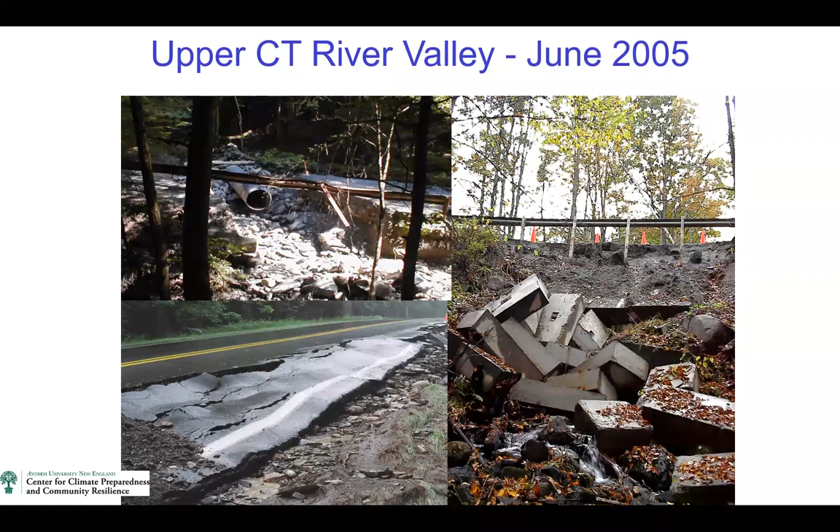So, just like others have seen around the country, there seems to be an increase in the frequency of more extreme weather events. Now, these events are occurring at a scale that exceeds the in-place capacity, or what we call the resilience of built infrastructure. Now, in the state of New Hampshire, it's become evident to every citizen in the state at some point in the past they have experienced this.

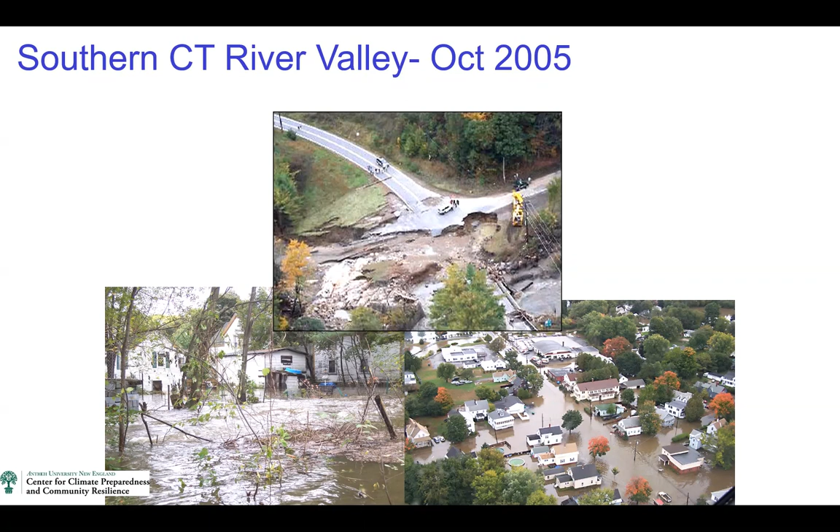Many of these storms were extreme events outside the historical norms. In this example, the rainfall amount had the likelihood of occurring in any one year of 1/5 of 1%. And that's basically the 500-year storm. And we see this in other places across the state. This was Western New Hampshire in 2007, and Western New Hampshire again in August 2013.

And because people are seeing warmer winters up here in the Northeast with more rain and ice storms versus snow events, the precipitation events don't necessarily occur in extreme amounts, but they still can be quite destructive.

This is because instead of rain occurring in the late spring or summer, and snow in the early spring and winter, the snow events, which melt slowly, we are now seeing more and more rain events in the late winter and early spring, and they're falling on frozen ground. And just imagine the runoff of falling on frozen ground. It is just like rain falling on pavement, and it runs off with no infiltration.

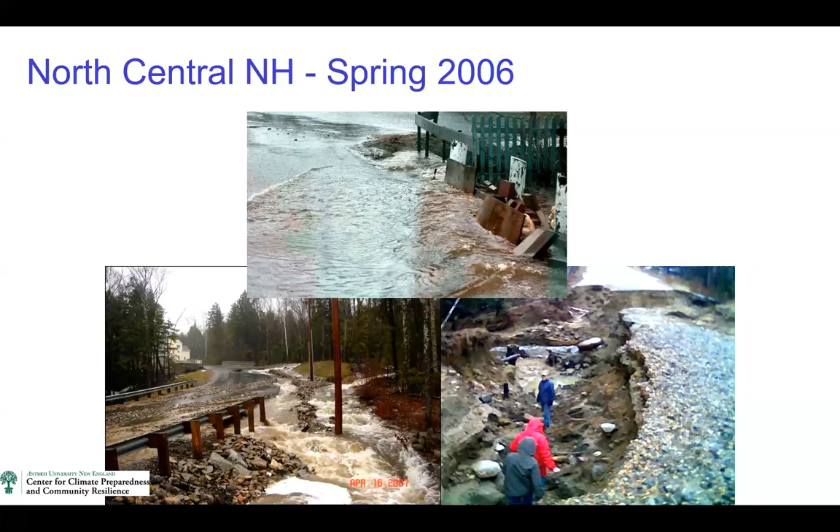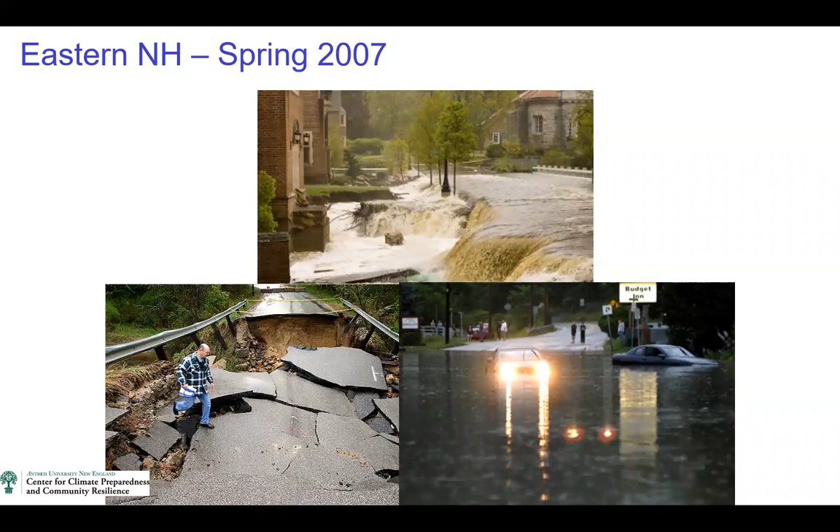And it can even be when the snow is gone. This is known as the Mother's Day flood in eastern New Hampshire. The ground was still frozen in the forested uplands of the watershed. And so even though there was no snow down below, the runoff event from a non-extreme storm event caused amazing damage.

But even these numbers are probably low, because the difference between what the government pays for in reimbursements and what it doesn't is significant. And we will dive deeper into this when Kevin Geiger joins the class next week.

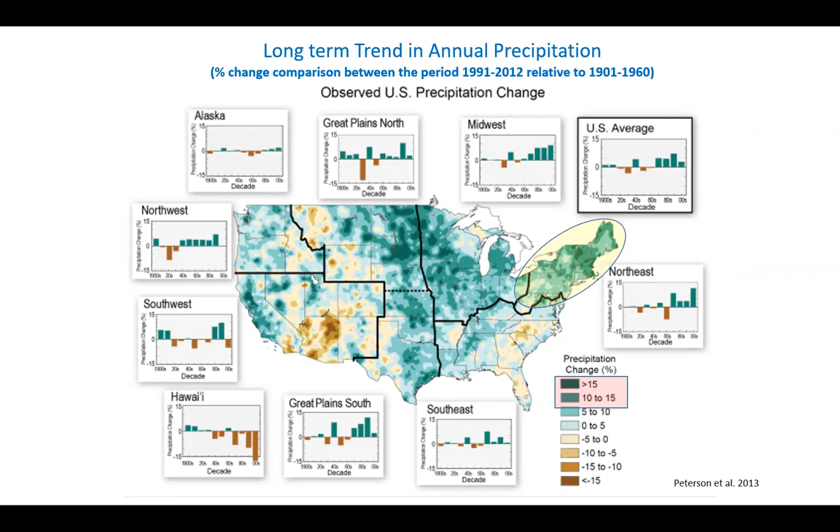Now, if we step back and just look at the larger trends, what the data is showing us is average annual precipitation has been increasing historically in the Northeast on the scale of 10 to 15%. And researchers have shown through a number of scientific studies, when one sees an increase in the mean or average and an increase in what we call the variation of events, there is a disproportional increase in the most extreme events.

And we see this here, where the Northeast annual precipitation has increased on the scale of 15%, but the extreme precipitation events have increased by 71% over the same period. And this is a fourfold difference between annual average and extreme.

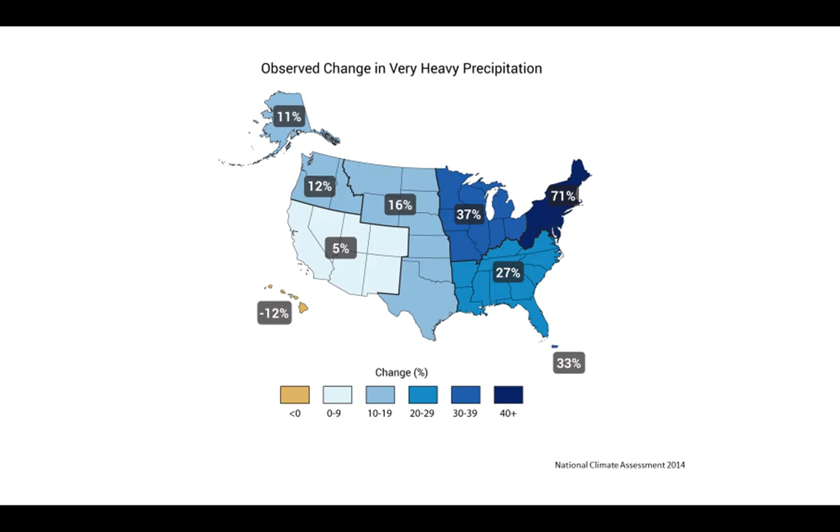And if we look at whether these trends are projected to continue, in the pessimistic future scenario, which is we continue doing what we're doing right now as far as loading carbon dioxide into the atmosphere, the northern United States is projected to receive more precipitation, especially in the winter and spring periods.

Now, the areas with the red dots on these maps show where projected changes are large compared to natural variations caused by other natural phenomena. Areas with the hatches show where changes are small and relatively insignificant compared to natural variations.

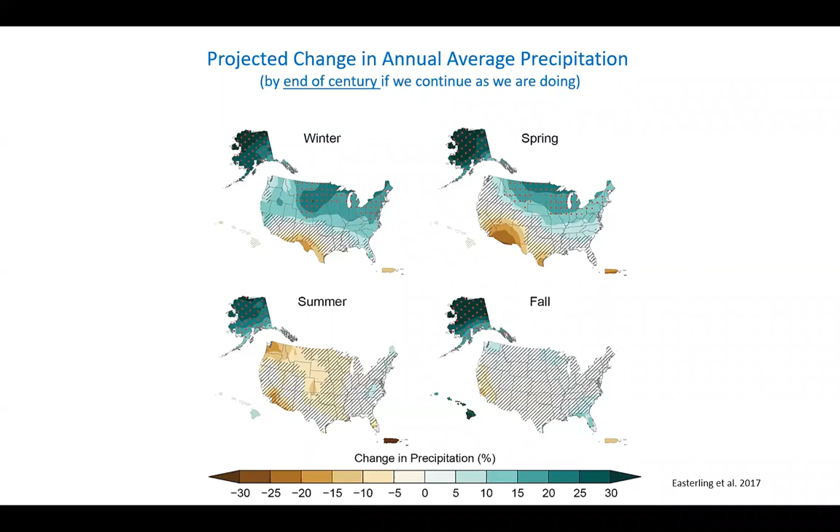Similarly, extreme precipitation events in the Northeast will also increase on the scale of 30 to 40%. And even with the optimistic future where global temperatures are kept below 2 degrees centigrade, which is the goal of the Paris Accord, there will be increased impacts.

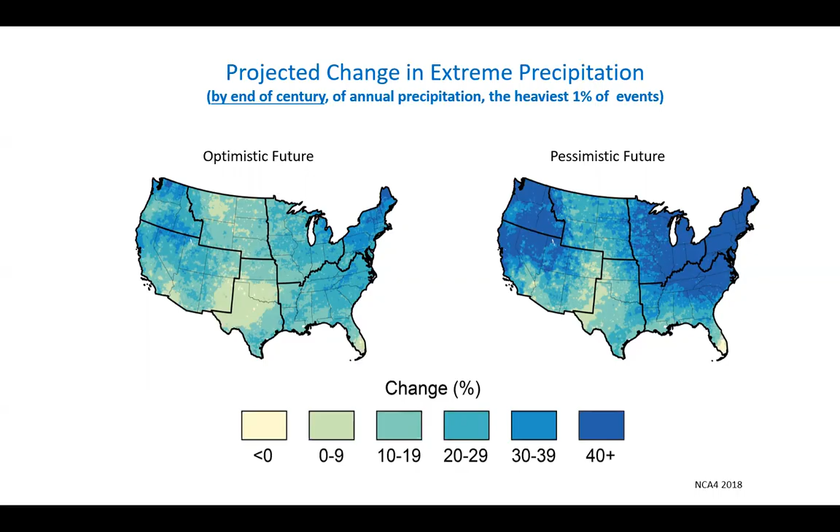So in this context, I want to cover a culmination over 10 years of research by Antioch researchers, both in New England sites and the upper Midwest. But for today, I'll just be referencing 3 of these, which are in New Hampshire. And I'm going to focus on the economic arguments being put forward that associate the scientific analyses.

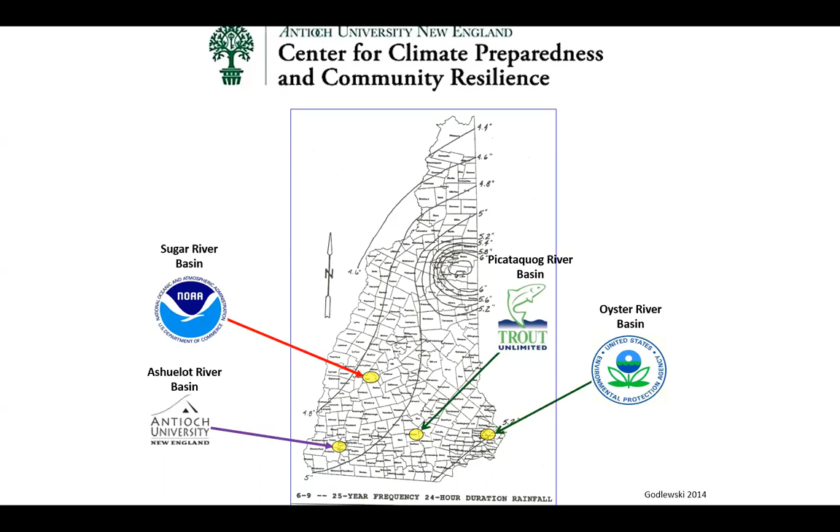Now, the economic arguments being framed in these 3 studies are around not building resilience into a system. An example here can be seen in Keene, New Hampshire, where Antioch is based. In 2005, an extreme precipitation event caused damage to the drainage system and associated road. It was approximately $8,000 in cost.

Well, the city repaired the damage with the help of some federal funds. But because they used the federal funds, they were required to replace the obviously undersized drainage system to the same size and specifications. Well, 7 years later, it happened again, but the damage costs were significantly higher, again due to the undercapacity resilience of the drainage system.

Now, the overarching take-home message is to understand the incremental cost, what we call the marginal cost of building resilience into built infrastructure, compared to the costs of such infrastructure failing. So this argument is known as a damage avoided cost strategy.

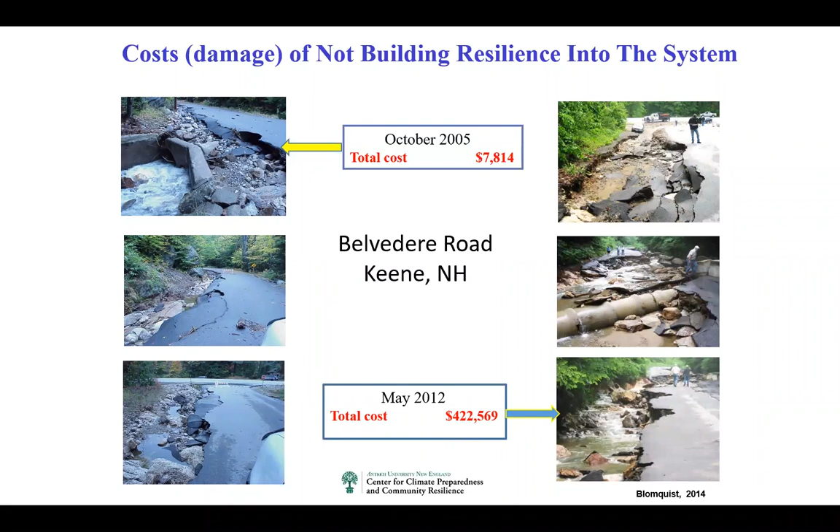An equally educational example, building resilience into water conveyance infrastructure versus the cost of damage occurred, came just after we completed a study in Southwest New Hampshire for the Ashuelot River watershed. Just 1 week after we reported out our results, a 500-year storm event, that's 13 inches falling in 24 hours in this region, hit the watershed.

And in fact, the Federal Emergency Management Agency, FEMA, has collected data over time to show that it is typical to see damage costs being 4 times the cost of building resilience into infrastructure. And speaking about FEMA here, for this location, they only reimbursed about 30% of the damage cost. Again, we will learn why this is occurring when Kevin Geiger joins us next week.

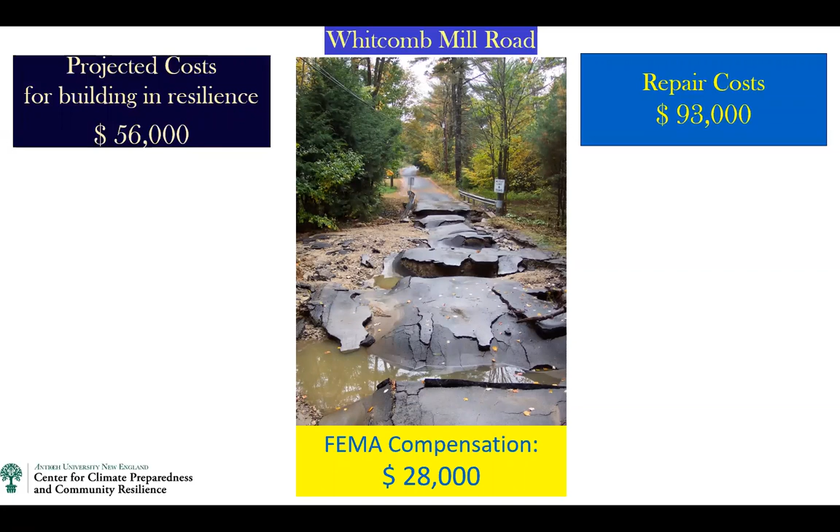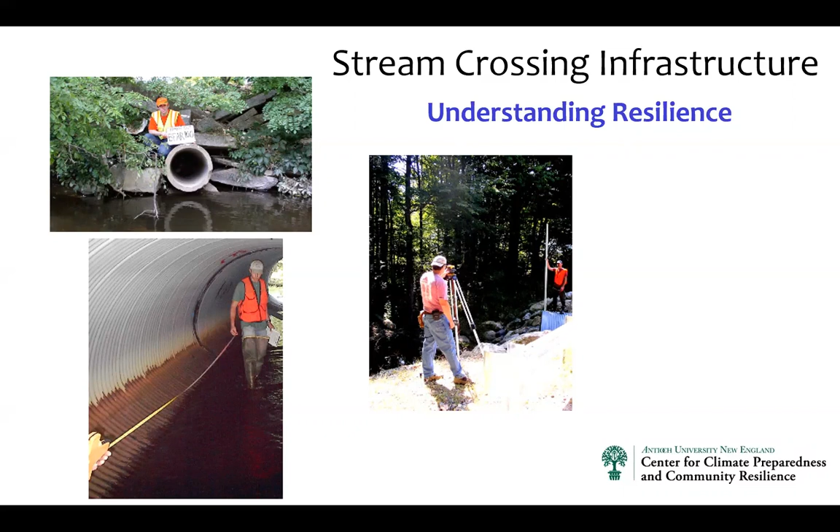So, our research focused on assessing the vulnerability of communities' water conveyance infrastructure due to a changing climate in the context of a changing landscape. In short, we were looking at culverts' capacity to pass peak flow of runoff. Now, why focus on culverts? Well, it introduces easy to understand discussion of land use, increased runoff of water, and projections about the future.

And culverts are easy to field check and measure so that we can test the models we're using. And culverts have a tangible dollar value attached to them that can be used to do replacement and mitigation cost analyses.

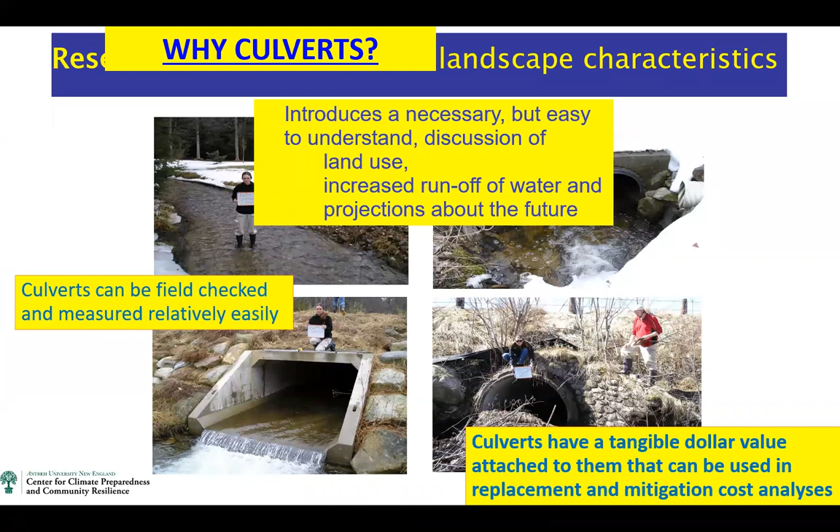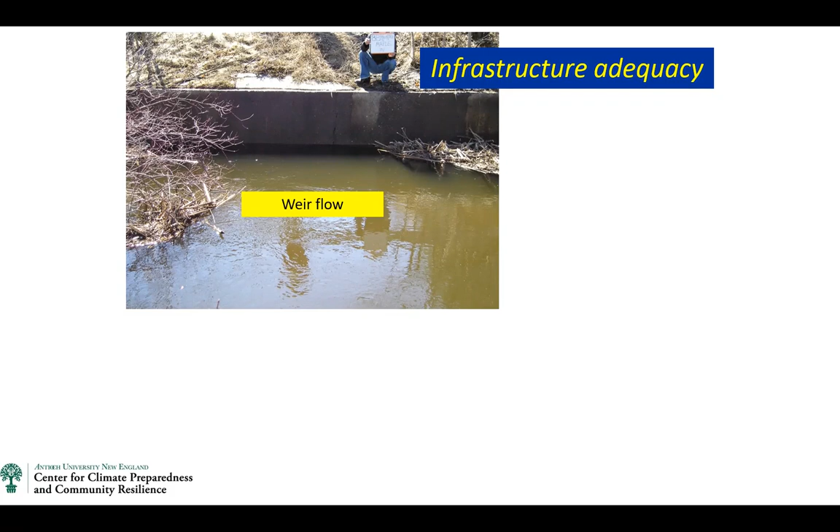So for our study, infrastructure adequacy, that is whether a culvert was properly sized, either for historic or future precipitation events, came in 3 designations. One was it was adequate, okay, which means it was in weir flow, that at the peak flow, water could get through the culvert. Then we had what we call close to orifice flow. This was transitional, where the peak flow completely filled up the culvert and there was not any margin for additional runoff.

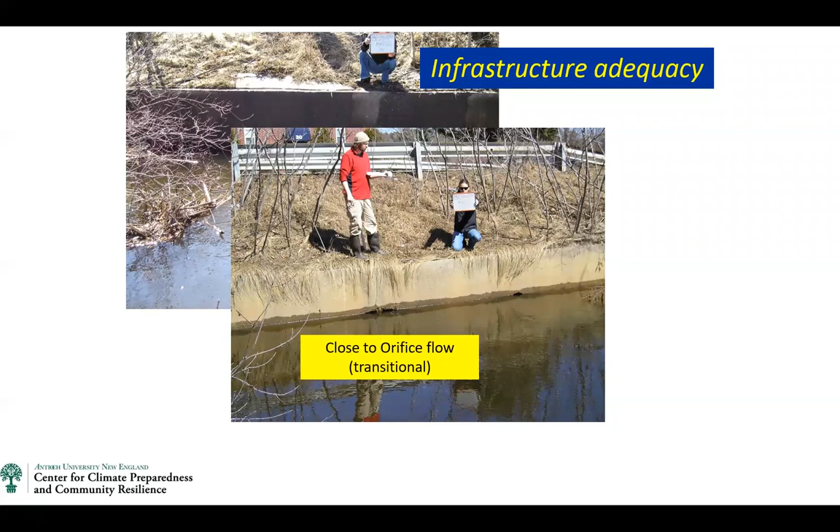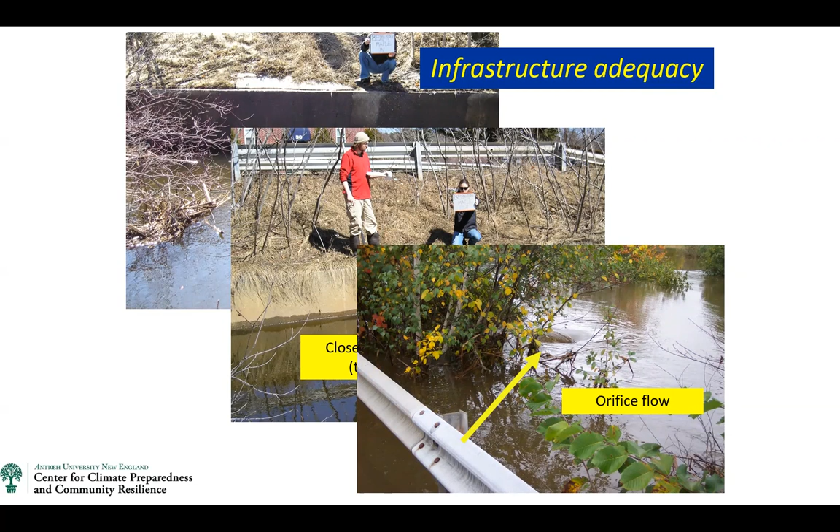And then there was orifice flow, where the pipe was undersized for the amount of runoff and water basically started to back up. You see this little picture here, that whirlpool, there is actually a culvert 4 feet below that.

Now, there's going to be associated cost impacts from undersized culverts, both related to up and downstream property damage, either from flooding, erosion, sediment deposition, or sediment transport further down the watershed, impacting natural systems as well as built infrastructure.

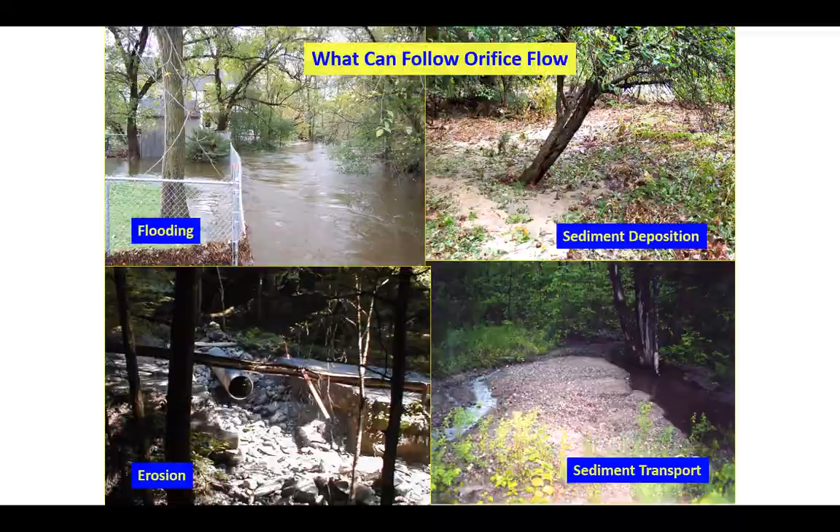Now, of course, we as scientists always make things a bit more complex, but in essence, we are using well-tested approaches in these studies to build a view of the current and future infrastructure capacity and associated costs. The analysis of changing precipitation patterns was looked at, considering also a changing landscape, that is, putting more impervious surface on the landscape, to first determine, were the current culverts in place vulnerable or resilient?

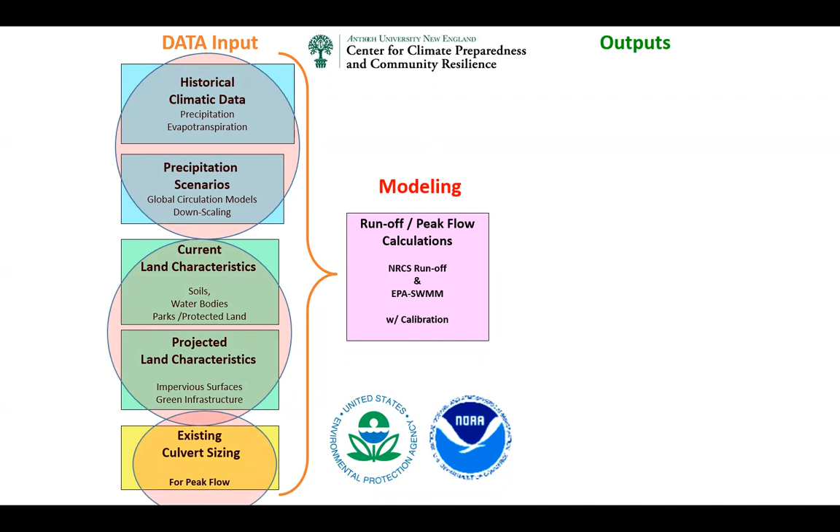We would use off-the-shelf hydrologic models to provide the outputs, and the outputs would assess the capacity and resilience of the current infrastructure, and from this analysis, understanding system resilience.

And we could consider response options such as upsizing systems for the expected flows, that is, making larger culverts or stream crossings, and also how we might mitigate the impact in this case by building out the watershed utilizing green infrastructure. And this is what Dr. Robert Roseen will go more in depth into and provide cost analyses of what that means on Wednesday.

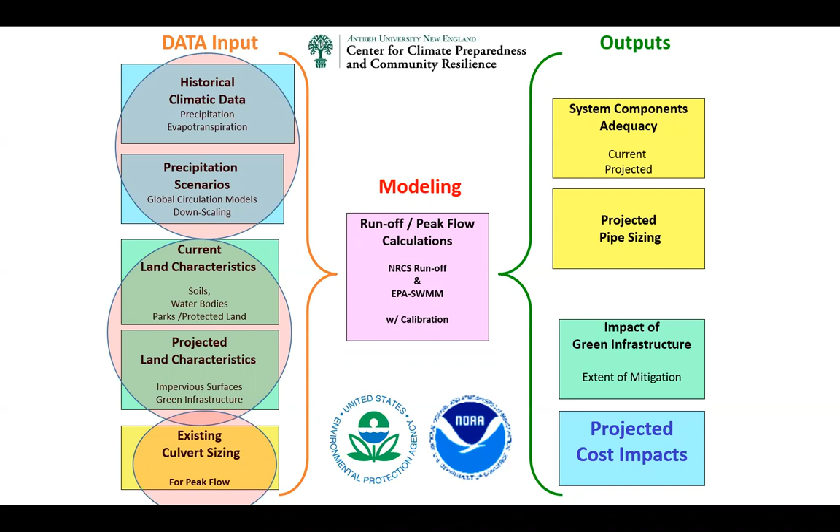So let me use one example of how one would pull together the various pieces to conduct a vulnerability assessment and the associated cost impact analysis. This is a multi-year study we did that was funded in part by NOAA in the Lake Sunapee watershed. You can see that watershed had a lot of micro watersheds in it. And so we were looking at approximately 210 infrastructure choke points.

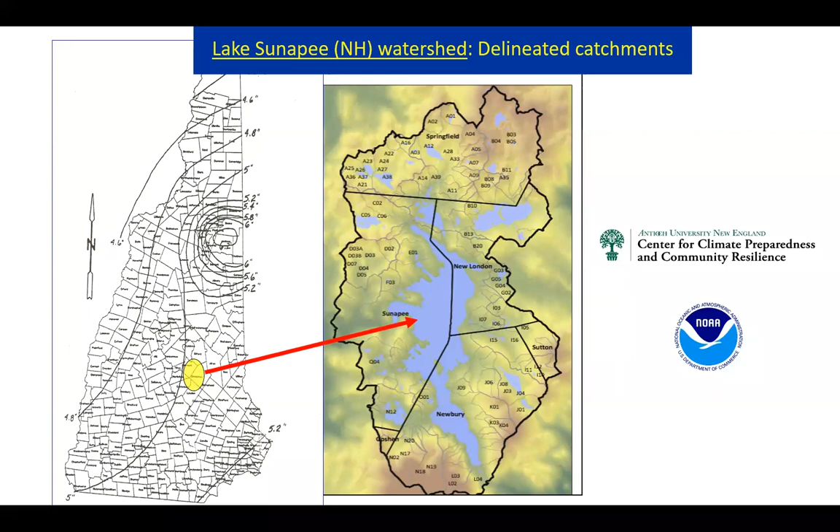Now this example of our outputs was called a stoplight map, red being undersized road crossings, stream crossings, green adequate, and yellow at 100% of flow capacity, which are transitional. So we were able to identify specific locations of undersized culverts to the peak flows of stream and road crossings, both historically and projected into the future.

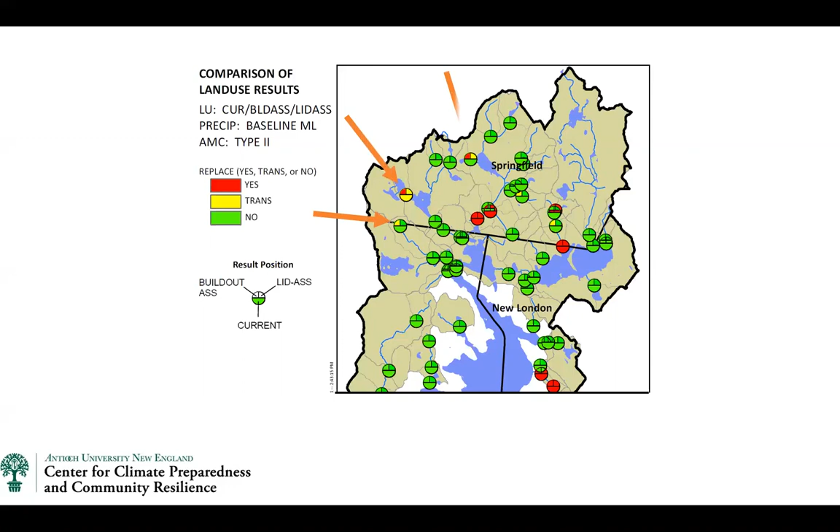Now, the future scenarios not only looked at projected precipitation from a changing climate, but also considered increased impervious surface within the watershed due to projected development patterns based on master plans and zoning ordinances. Thus, they informed land use planners about places not only where the culverts were possibly in need of replacement, but also what parts of the landscape where they may curtail development or enforce mitigation measures.

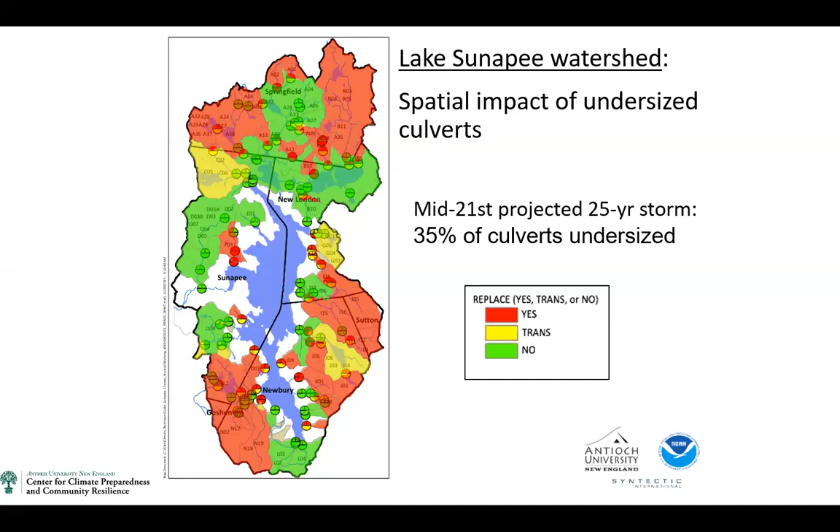Now, doing the associated economic analysis, we used national construction cost estimators, such as RSMeans construction tables, to estimate the cost of replacing each size culvert with one of adequate capacity for any future projection. So pricing schedules were developed for each culvert size and type. And you can see that this looked at labor costs, materials costs, design costs, etc.

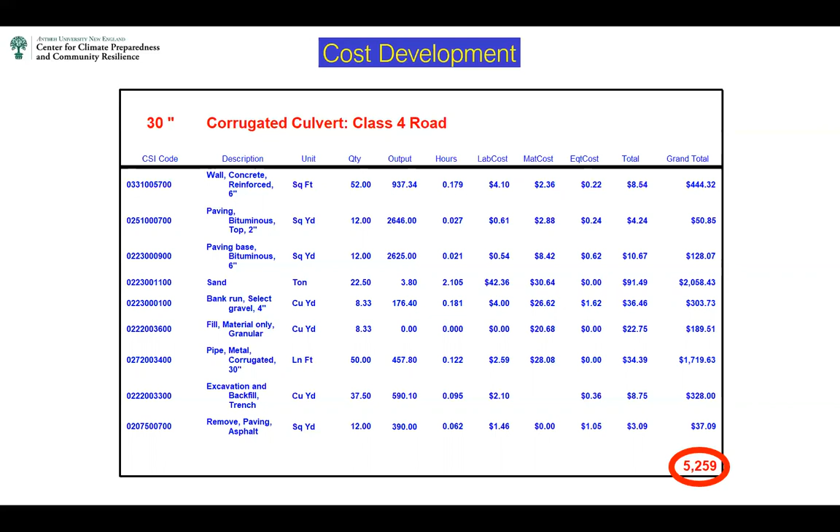Now, we ground-truthed these culverts by going out with the local DPWs to see where they had already seen such damage. And then we extrapolated to the entire basin for specific culvert sizes based on our cost estimator pages. So for one sub-basin, the White Brook sub-basin, you'll see, using our construction cost estimators, we were able to come up with a total cost for different size culverts that needed to be upsized.

Now, if we extrapolate this one number based on the culvert sizing to the whole watershed, we could see a $2 million increase in expenditures to make all culverts resilient.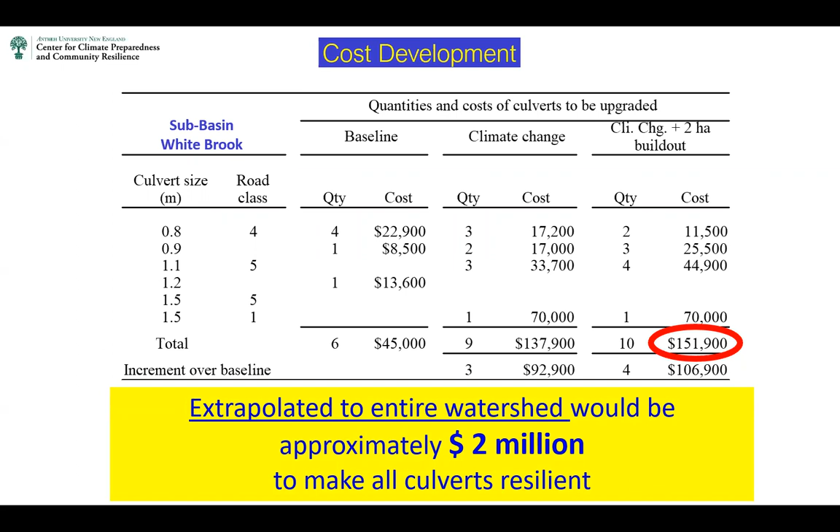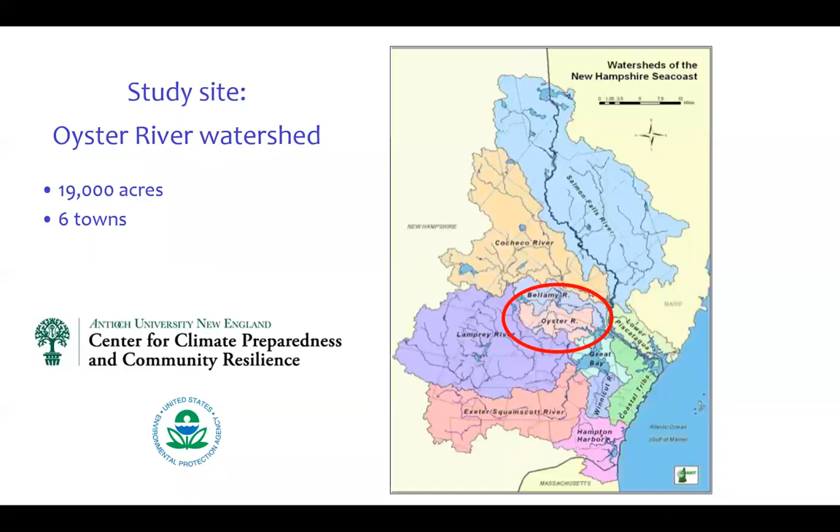Now, another study looking at the same dynamic, but this was a coastal watershed that wasn't as flashy, only a 400-foot elevation difference between the top of the watershed and where the stream emptied into the ocean. And in this coastal watershed, one thing different than the Sunapee watershed is that there was a lot more build-out. That is, the watershed had been built out a lot more, so there was a lot more impervious surface.

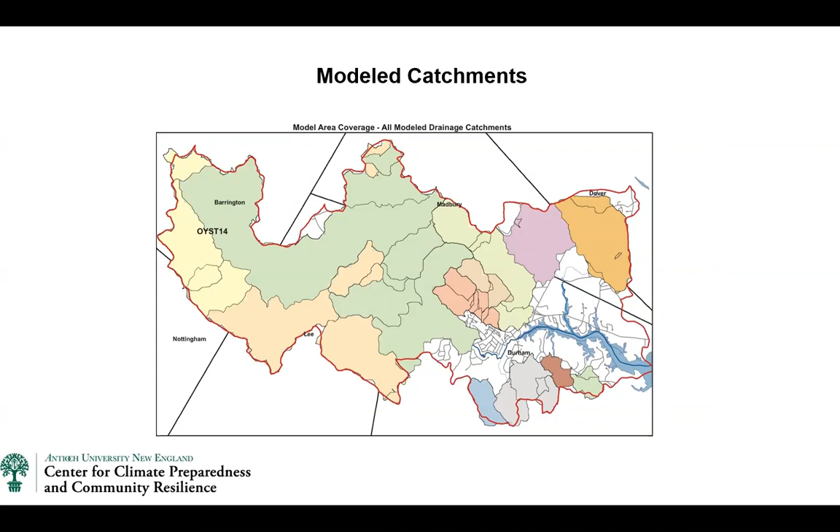Now, what needs to be realized is that all the culverts have to be replaced at some cost. So the true cost to consider is what we call the marginal cost of upsizing, because they do have to be replaced. And the marginal cost of upsizing is the additional cost of putting resilience into the system to meet extreme future events.

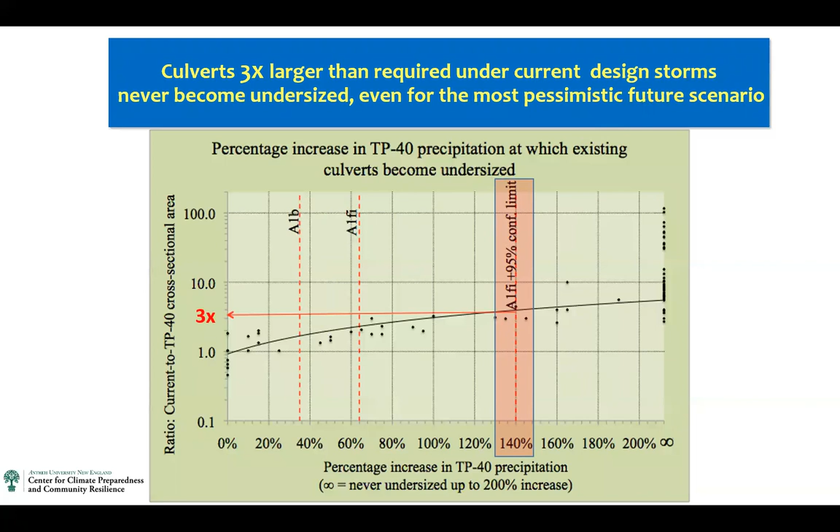Now, let's drill down a little bit in the study. If we look at the impact to one small town in the study area, and summed up the cost of bringing their infrastructure up to the size to meet even the most pessimistic future precipitation scenario, the upgrade costs are approximately $168,000.

Now, this may seem a lot of funds for a small town. And if this total cost were the focus of a communication to the citizens in order to get their approval to expend this sum, it may see quite a bit of opposition, especially for something that is uncertain in regards to future weather. So it is important to reframe the cost argument so to put this replacement cost in perspective.

So for this town, consider the $168,000 upgrade cost is approximately 1.6% of the $10.5 million annual town budget. And this budget is based on a property tax being charged to homeowners of approximately $26.76 per $1,000 assessed value of the property.

So if all the undersized culverts were replaced in a single year, this would increase the tax rate to $27.18 per thousand. And this is actually only an increase of 42 cents per $1,000 of property value. So this is a bit more palatable for citizens to accept.

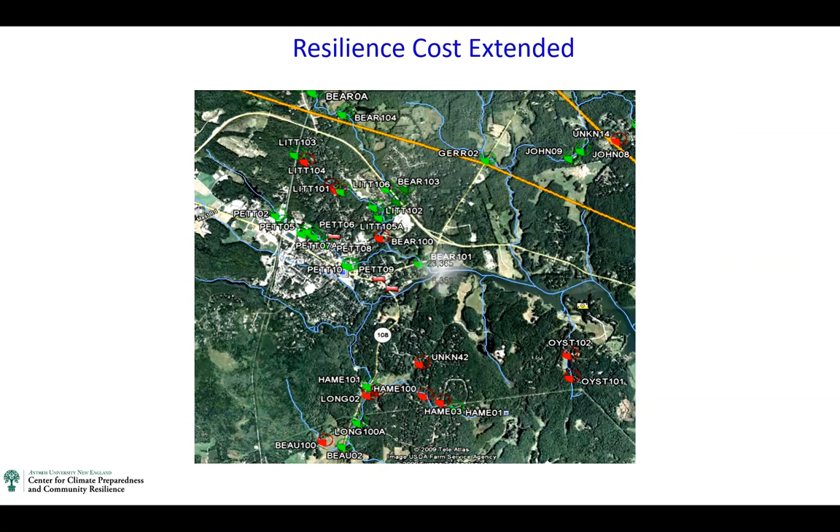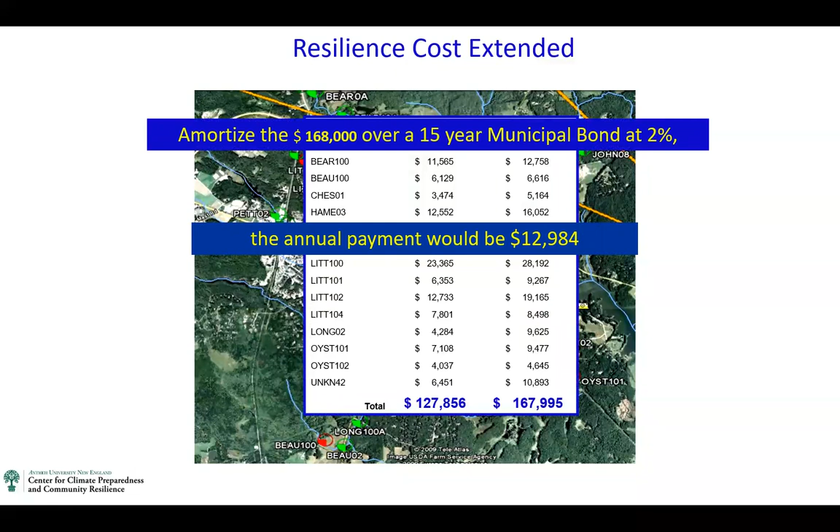But we can go further, if we could use the time value of money. That is, if the town could amortize this $168,000 over a 15-year bond at a 2% interest rate per annum, the town's annual payment would be approximately $12,000 or $13,000 annually. And that's an increase over what they're doing today.

And based on the tax rate of 26.76, the annual bond payment would add approximately 3 cents per $1,000 assessed value for the next 15 years. Now, if we were to communicate this building of resilience into the system in this manner, there probably would be very little opposition due to this small incremental annual tax cost. Now, we will be addressing bond financing in more depth during the last week of the course.

So, take-homes here so far are all infrastructure has a depreciation or durability life on the landscape. So if the life is long enough to be impacted by future shifts in climate parameters, it may be wise to build resilience into the system. And realize once any built infrastructure is put on the landscape, there will not be a lot of political will to subsequently replace it to add additional resilience, at least until it has run the course of its durability life.

The cost of building more resilience into the system must be viewed as a marginal cost, since the infrastructure has to be replaced at some time in the future. And finally, by not expending costs to build resilience in today, the future damage costs could be significantly higher.

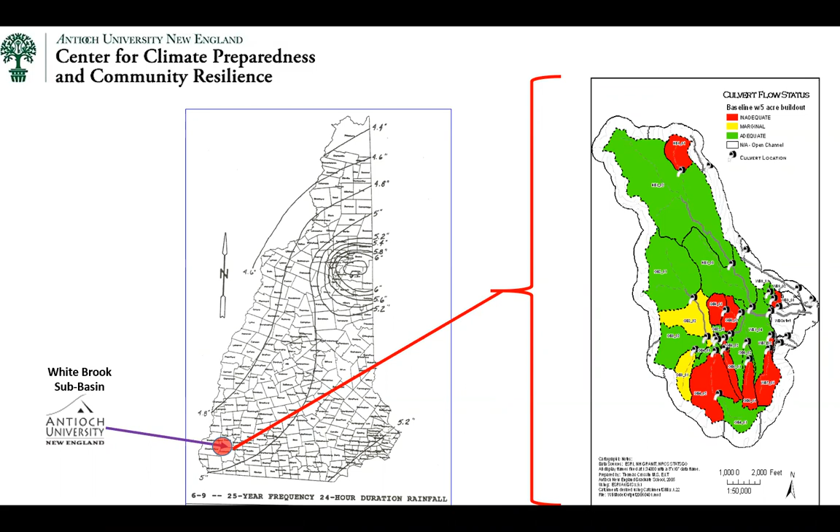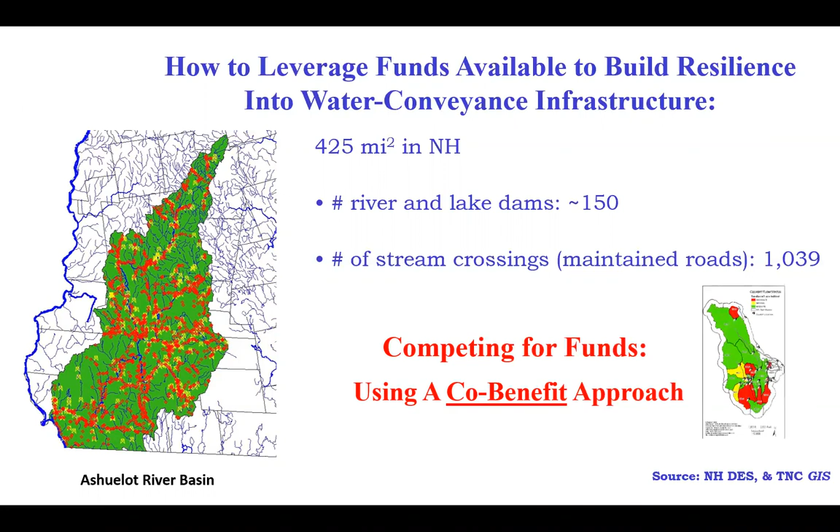Now let me just finish with one final small study that was done here in Keene, New Hampshire. That is how to leverage funds available to build resilience into water-conveyance infrastructure or into any infrastructure. And this approach is called competing for funds using a co-benefit approach.

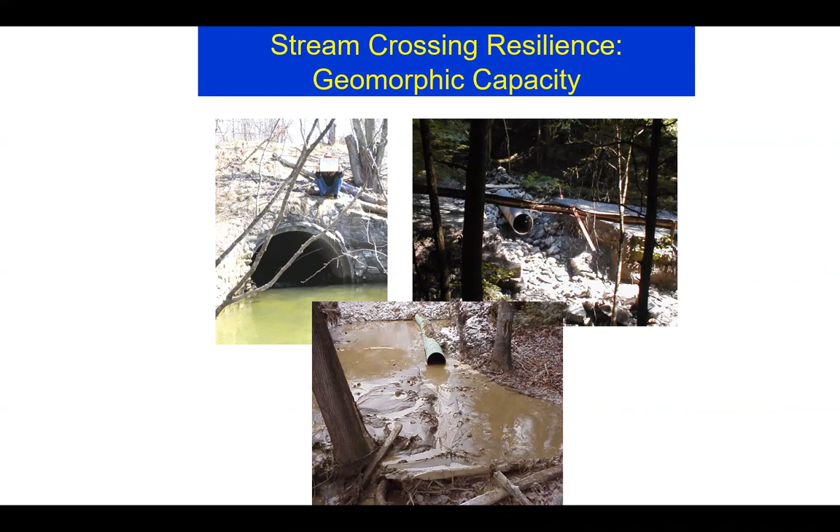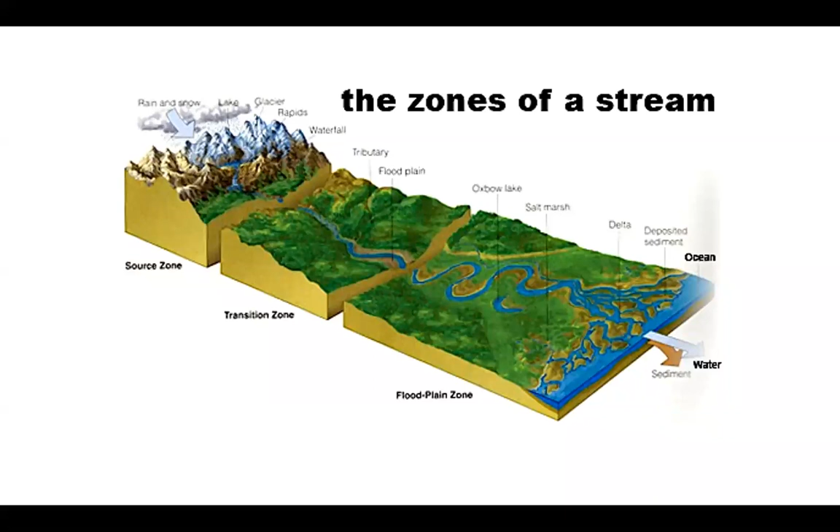So beyond just looking at peak flow in the Keene area, one could look at culverts based on what we call their geomorphic capacity. That is, were the culverts placed on the landscape in a proper way with a proper sizing that reflects the natural energy of the landscape that basically carves and creates the topography we see.

And as you see from this, at different elevations, there are different stream configurations as the slope changes, and you see an increase in carving and meandering patterns. The stream wants to do that, and if you put in a system that doesn't allow it, it will do work to try to get back to what we call the stasis of the system based on its location on the landscape.

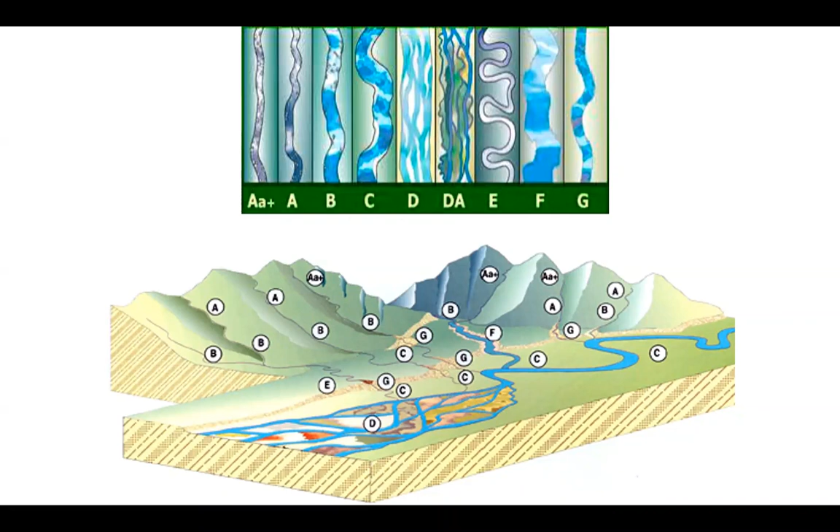So, if you do not do it, this is what you will see. You'll see basically the natural system will do work, and primarily that work is carving and moving material until it has the equalization of energy, and you have somewhat of a steady state. So you can model culverts for geomorphic assessment. And many state planners want to see that kind of analysis because they want to avoid extended damage, not at the road crossing, but extended damage along the whole corridor of the stream because of the possibility that the road crossing is not in line with the energy of the system.

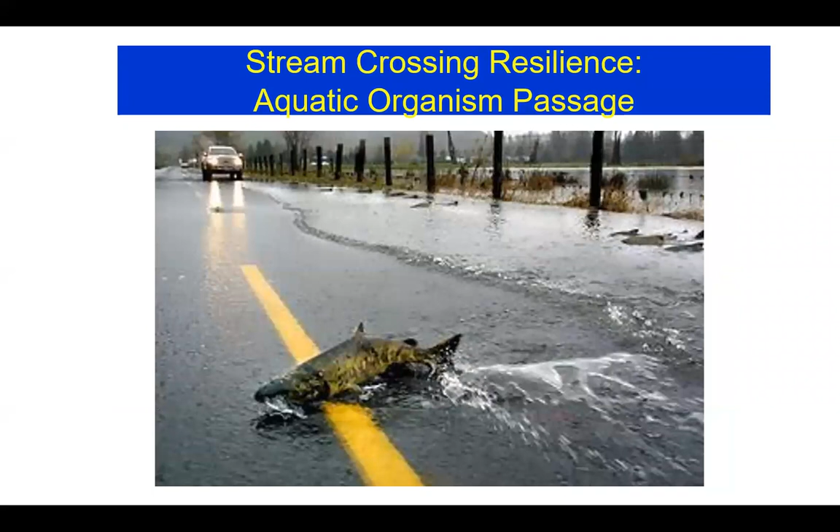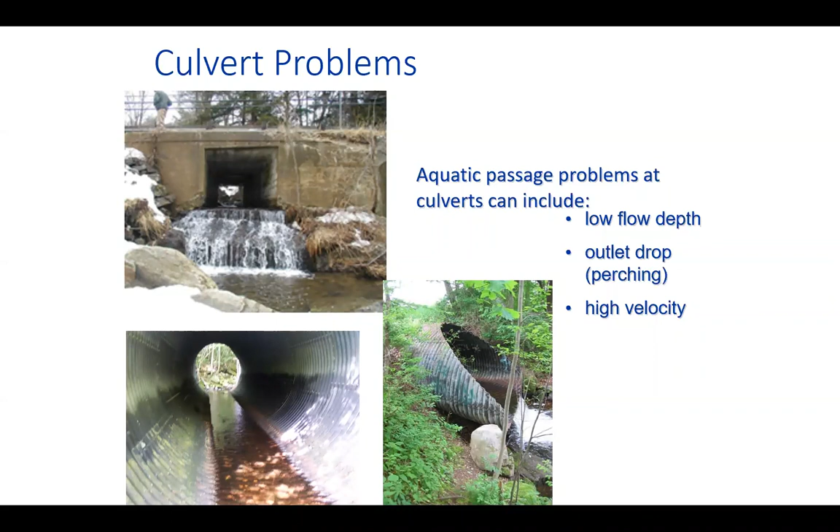Another perspective of the same system would be what we call aquatic organism passage. That is, are road crossings and culverts allowing passage of species such as fish and associate species such as mussels, which attach to the gills of fish. And we know that with aquatic passage, there are different problems for different species depending on both the velocity of water as well as the ability to pass through the culvert. So does the culvert include the ability for passage during low flow depth? Is the culvert at its outlet so high that species can't get over it? Is the water coming through it so strong that species can't swim up against it?

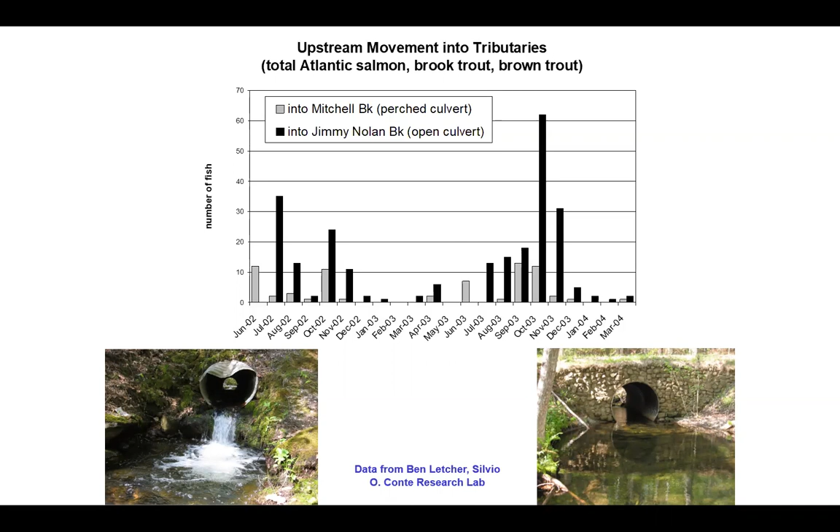This is just one study comparing two culverts, and the perched culvert on the left had a very high perch, a very high jump, and this is looking at tagged fish, in this case brook trout and brown trout, and their ability to move up through aquatic organism passage. And obviously the perched culvert had much less passage.

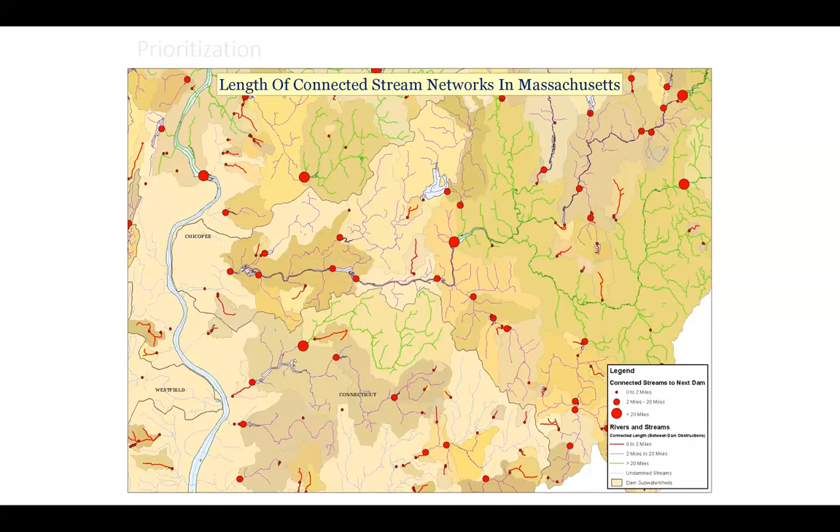And if we look at the same system on what we call a landscape scale, and conservation biologists call this looking at metapopulations, this is an example of connected stream networks in Massachusetts, okay, with major dams that constrict the connectivity of populations. And then if you add undersized culverts, you can see that the length of connectivity is reduced dramatically. And so if populations become fragmented enough because of dams and culverts, populations within a constrained length of stream could die out, be extirpated because of some event, either land use or natural event. And they are not likely to return until that fragmentation is removed.

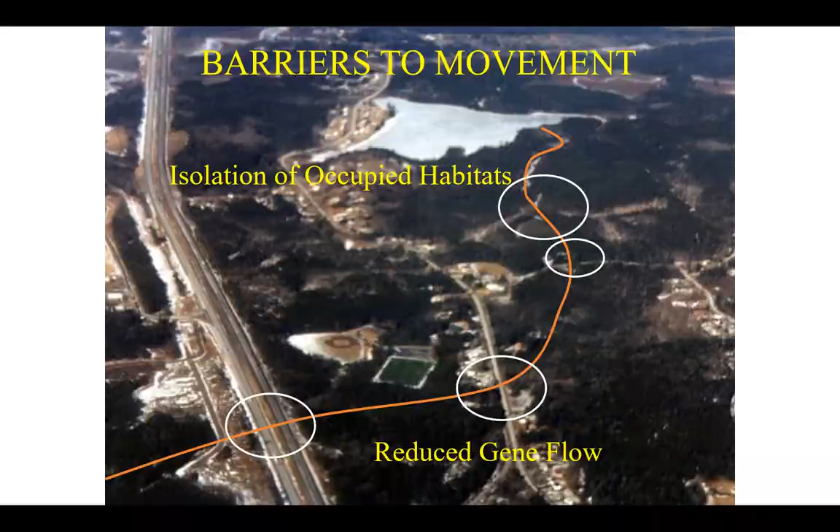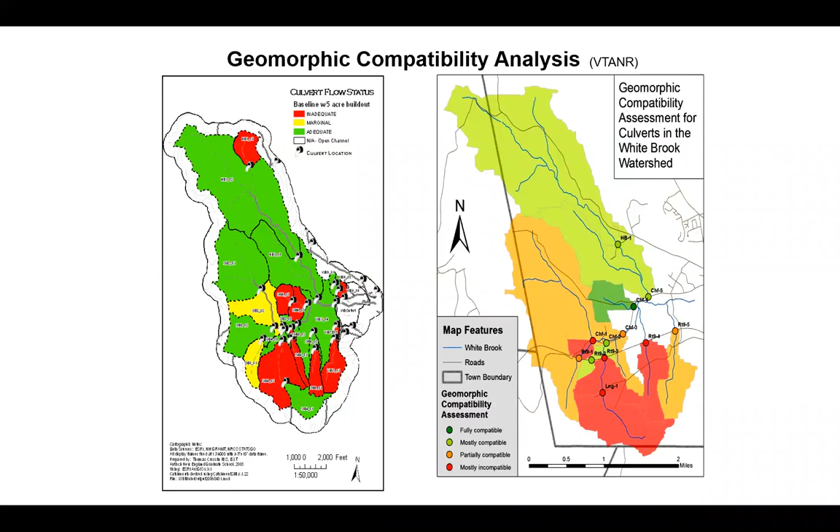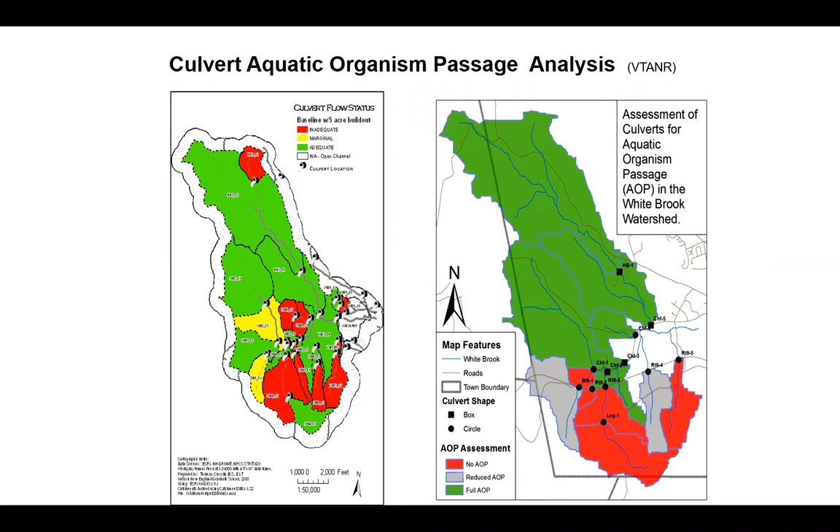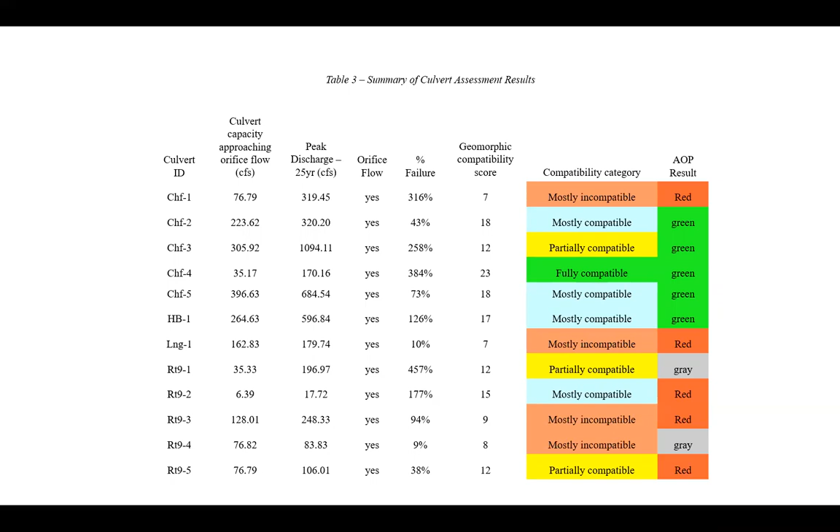So there's the geomorphic, and then we can compare our peak flow with aquatic organism passage. And again, we get the reds and the greens and the lighter colors showing whether the crossings are adequate or not. And if we put these three together and see which ones meet all three criteria, that is, which are undersized because of peak flow, not set right because of geomorphic compatibility, and will not allow aquatic organism passage, we can narrow down to a subset of culverts that meet all three criteria of being undersized.

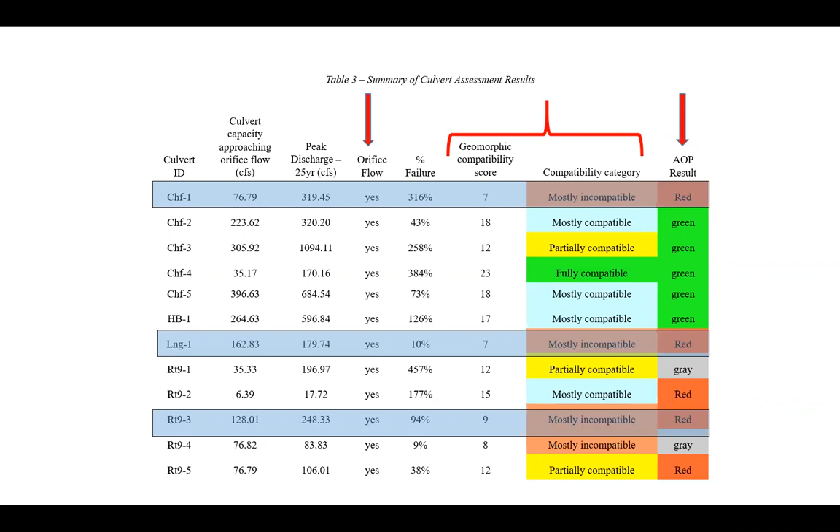And in this example, we were going after U.S. Fish and Wildlife funds to enlarge the culverts. And we were competing against a number of other potential funders in the Northeast. And we won those funds because we made an argument that showed the co-benefits of the culverts. And even though the U.S. Fish and Wildlife Service was only interested in aquatic organism passage, by showing the co-benefits, we acquired the funding to upgrade these culverts. So this is just one way to use co-benefits to make an argument to capture funding that's out there.